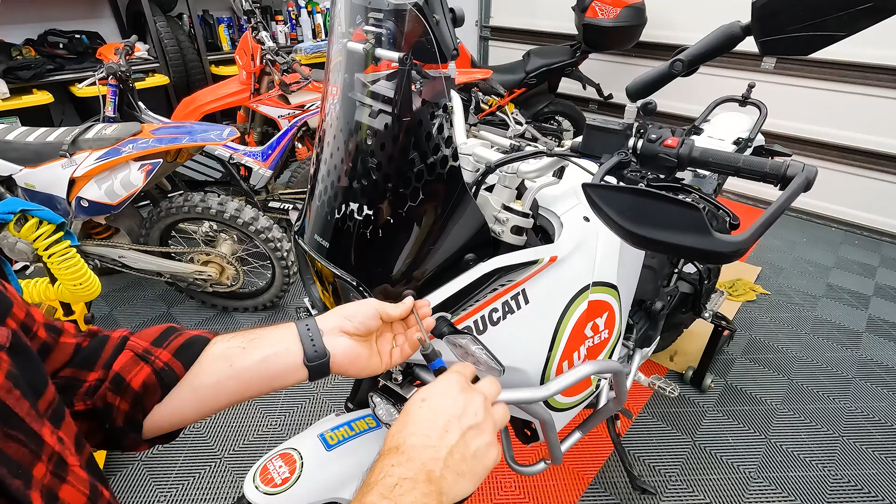These screws here, you can use a number 4 Allen and it will come off. These two are also number 4s, so we'll get them off now.

Behind this screw there's a big hex nut. It's really big, so I don't have a wrench that will get to that, so I need one of these. There's not a lot of torque in that, just holding it in place - you can almost hold it with your hand. I prefer to do it with this crescent wrench. Just be careful because the nut will fall. It stays on the rubber grommet, so you don't need to remove it from the rubber grommet - trust me, it's there.

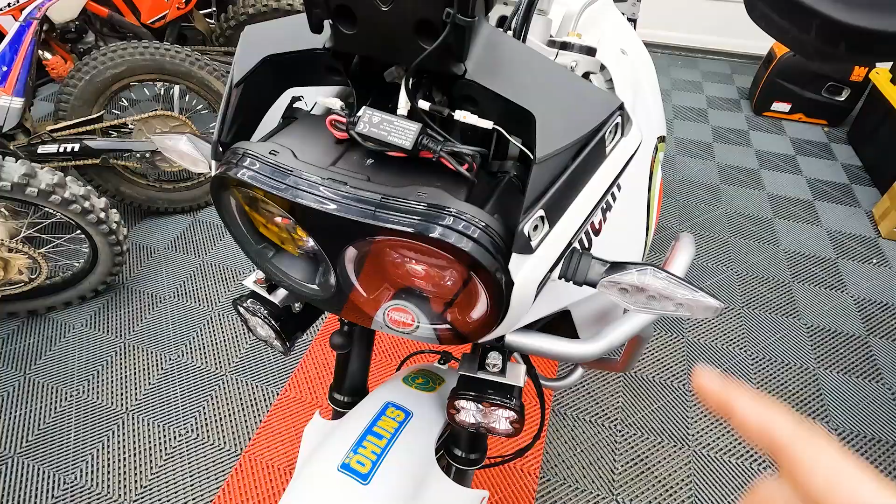Before removing the side panels, don't forget to disconnect the blinkers. So you have this one here for the left side, and you have this one here for the right side.

There's one hook here, another one here, and a big one down here. This was the nut - it's a metal nut - but this is the one that stays on the rubber grommet on the other side of the panel. And the last hook is here. It's a little bit more complicated to remove with the crash bars installed, but not impossible.

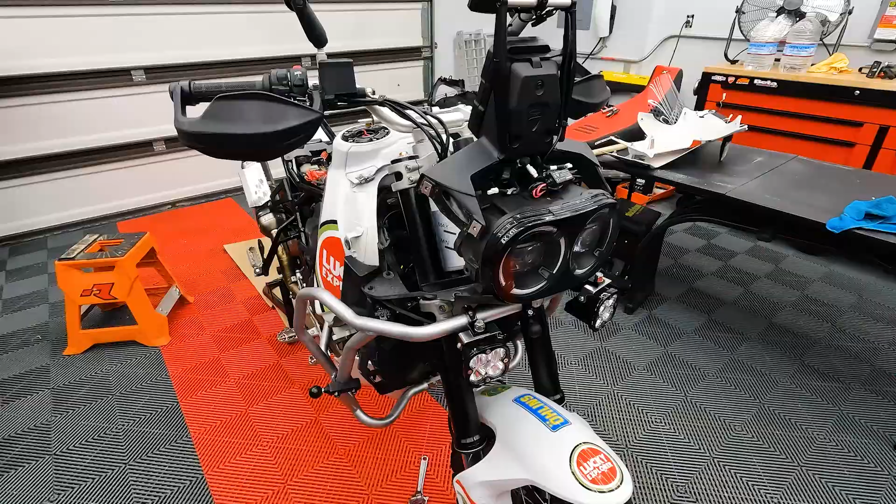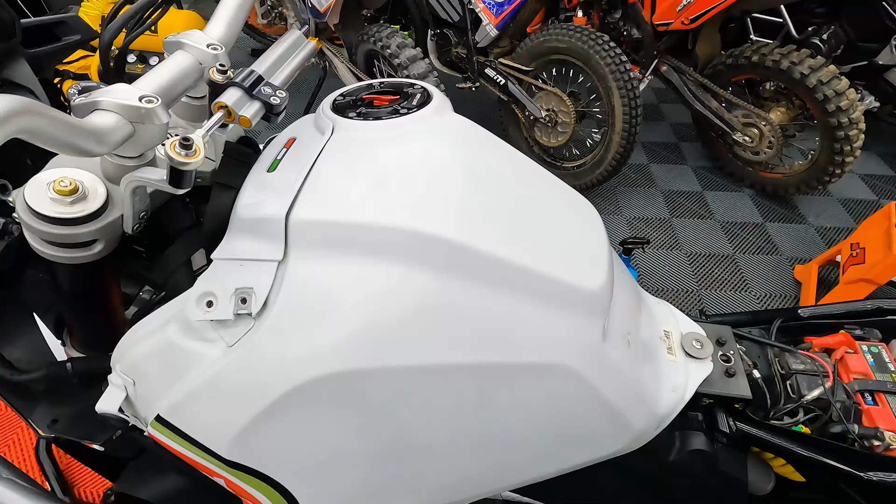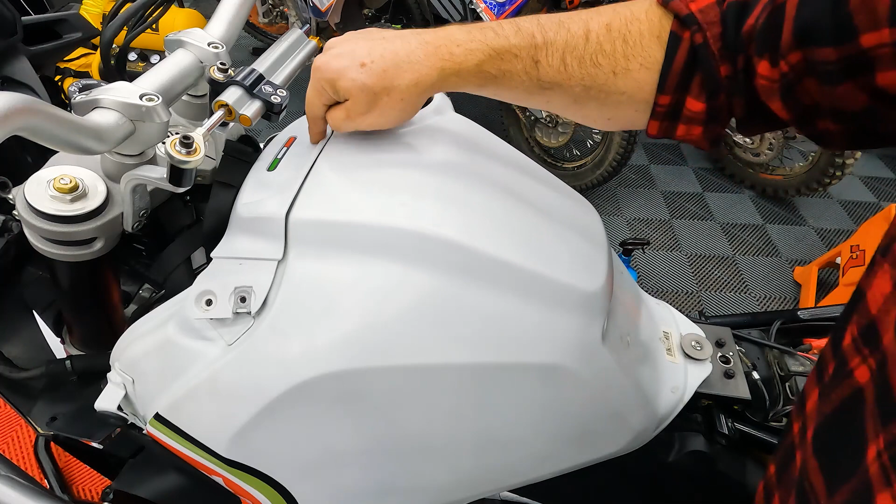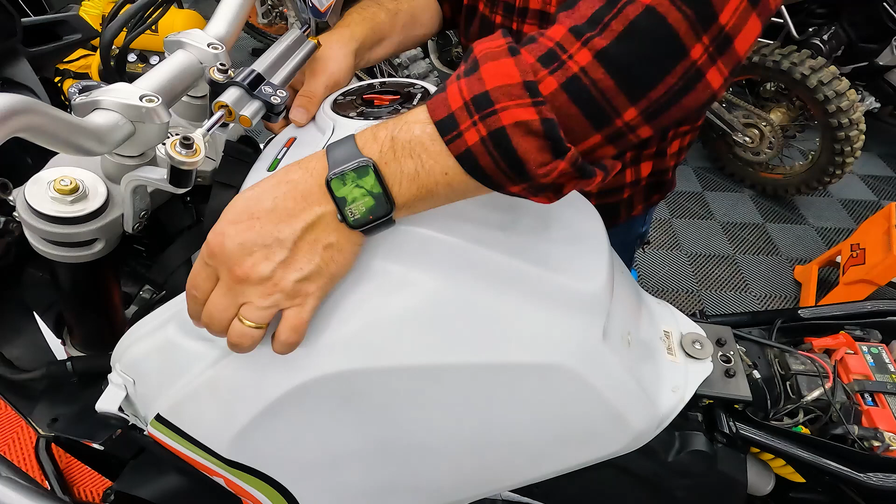There are two main screws that hold this tank to the frame. One is this one here, obvious. The other one is under this, so we're gonna have to remove this piece of plastic here. I don't see any screw - it might be that it's connected only by a hook. So we'll see. Yeah, as suspected, you just pull this out. So basically you have this hook here connected here, and there's this other feature that engages a rubber sheath here. So just take it out.

I suspect we're gonna have to take out the steering damper as well. This is not the OEM, this is one from Öhlins, an aftermarket one, but it's pretty much the same. So the supporting structure, which is this guy here and this one here, is still the stock one. So I can see the screw - well, it doesn't look like a screw really. So we need to investigate a little bit more. We'll go there.

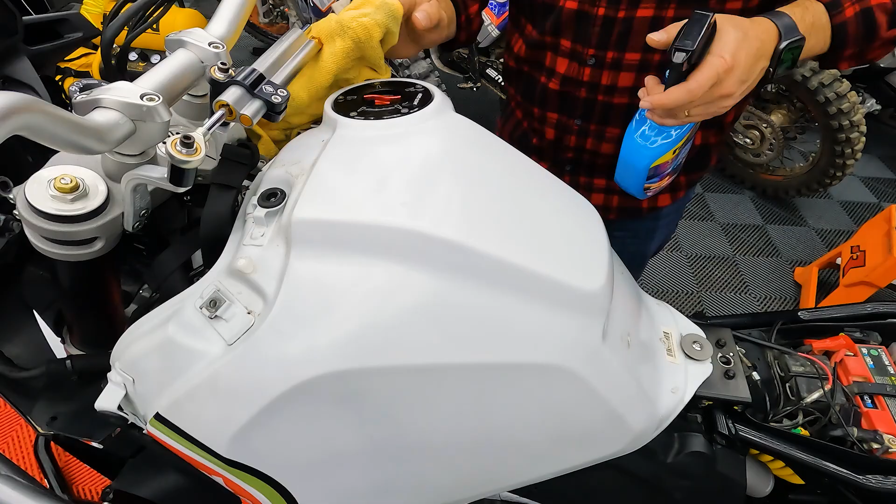This strap here I use for my Mosko Moto Nomax tank bag, so I'll just take it out here so it's not in the way. Instead of removing it completely, I'll just strap it on the back here.

So we'll take the entire stabilizer here by removing this screw here. You could remove this, but it's a little bit more difficult access. This one here you have to be careful because there is this spacer - I don't want the spacer to fall down. And you have this, but I'm gonna remove straight from here if I can access those screws. Well, it doesn't look like it's easy access, so I'll remove the entire bar stabilizer first, and then we'll see how I go from there.

If I remember, this is a number 4 - yeah, number 5. I put some Loctite when I installed it last time, so I think I'll have to do that again when we reinstall. Same with this. By the way, this is awesome in the sand, really helps much more than the OEM bar stabilizer. Okay, so this is out.

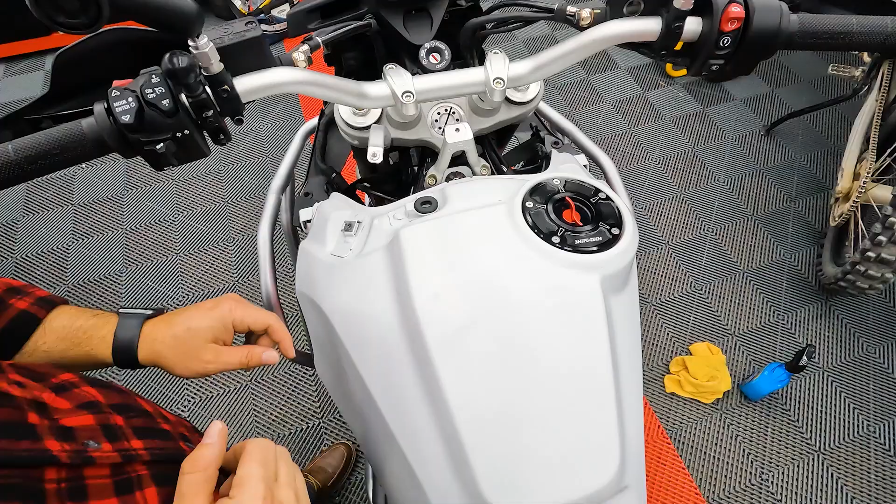And it's out. Okay, now I'm going to remove the support head for the bar stabilizer just to give us some more room. I suspect that the tank is going to pivot this way, so this is going to be in the way. So I'm going to get this out.

Looks like a number 5 as well. Never took this out, and it feels like it was Loctited as well. So we'll put either a blue Loctite.

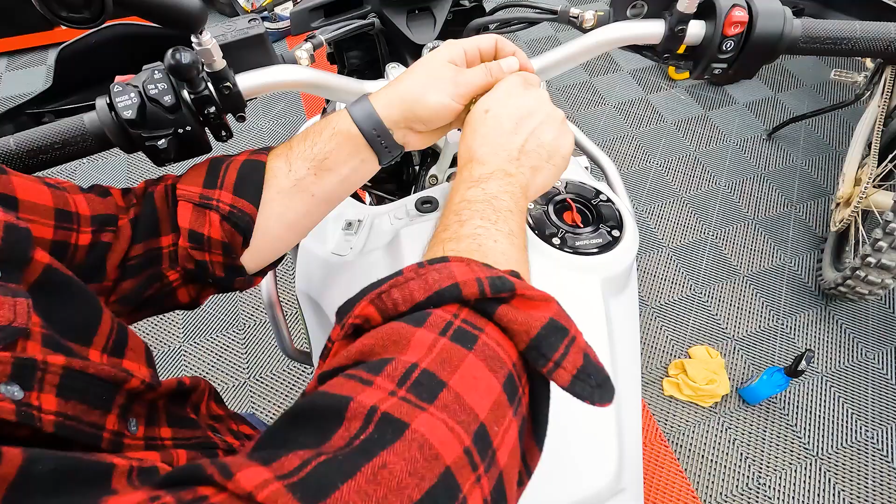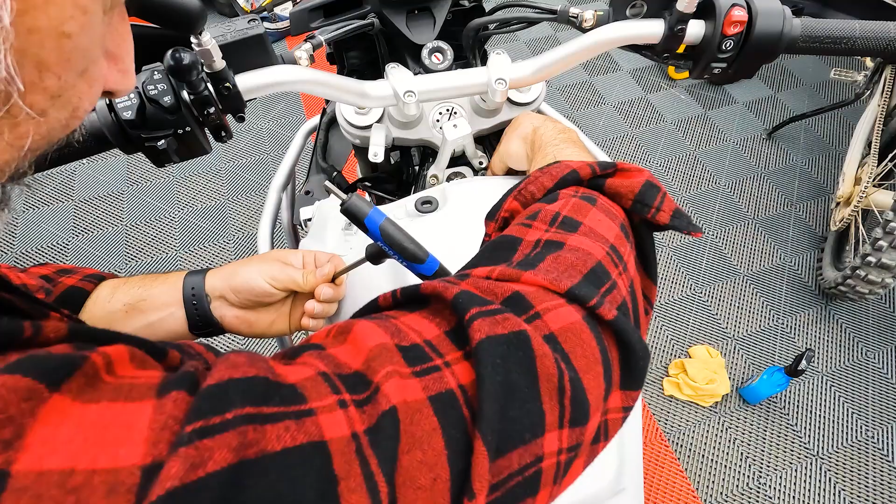Not sure if a red Loctite is necessary. Oh, didn't like that. There are no washers on the other side, so no worries. And it looks like it came with blue Loctite, so we'll put blue Loctite when we are reassembling.

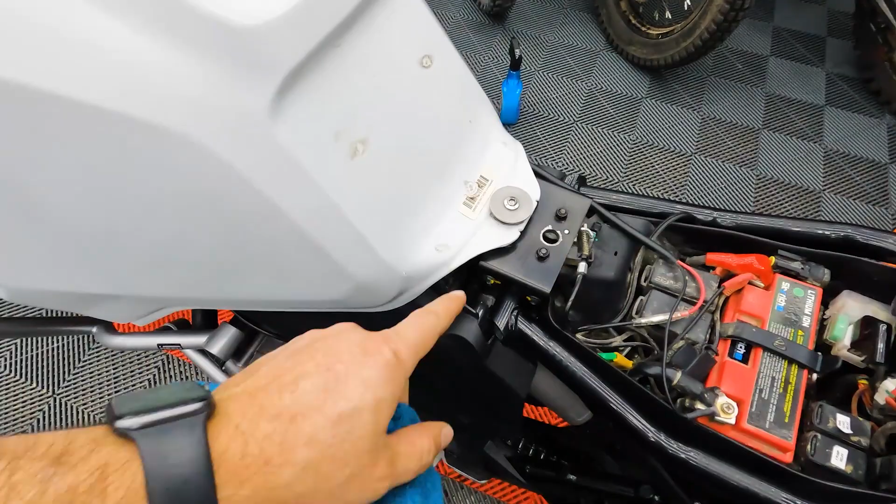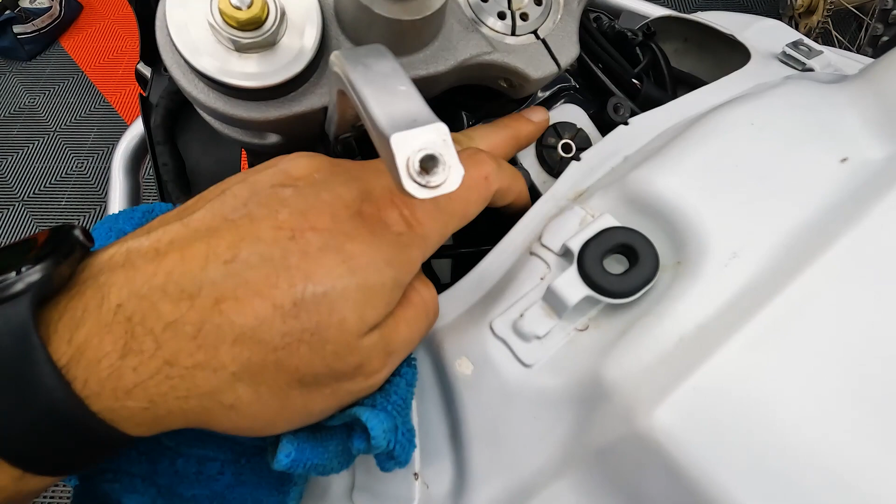At this point, you can see that the tank already moves a little bit. This is actually weird, and I'll show you why. This is one of the screws that hold the tank to the frame. As you can see here, there's no screw here, there's no screw holding this part to the frame. So according to the parts manual, let's try to zoom in a little bit more here.

As you can see, there is a screw and a spacer here that goes through the back of the tank into this piece here. Seems like a rubber isolated mount, which seems very similar to the one on the front.

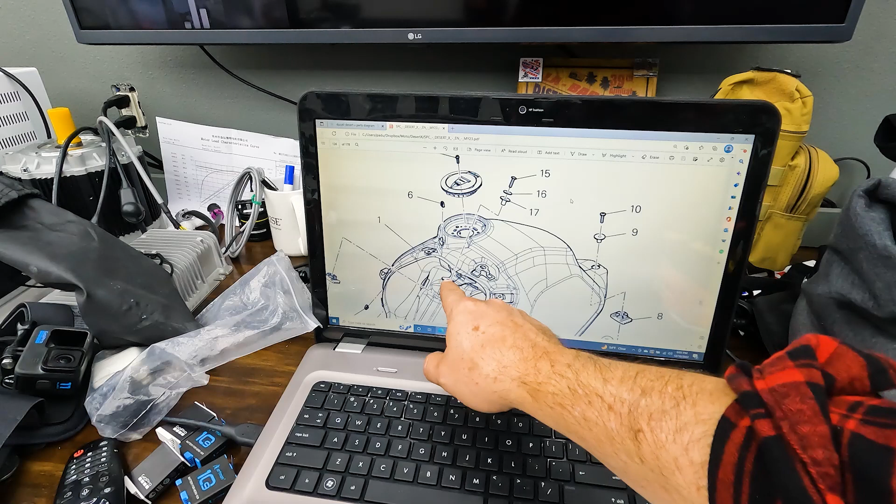Now let's take a look at the front of the tank. You can see a flange, a metal flange here, which is on the tank. Let's slide a little bit to the other side here, it's going to be very visible. So you can see the isolating mount here, which goes to the frame.

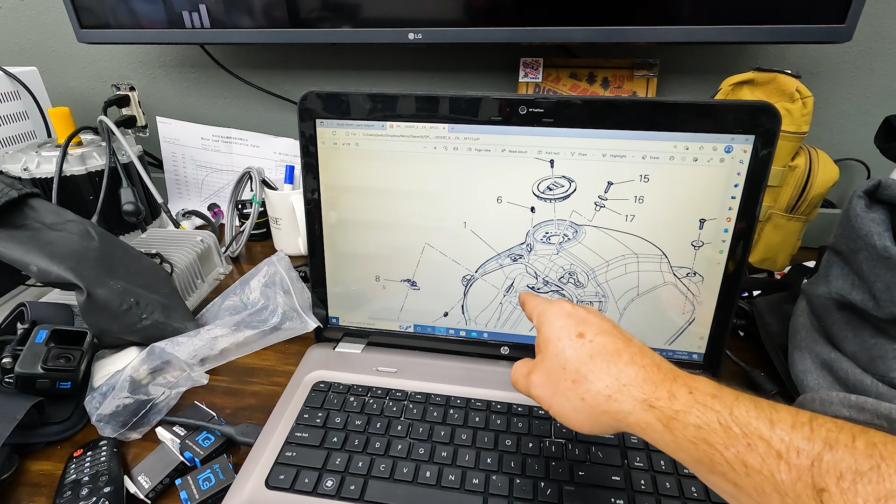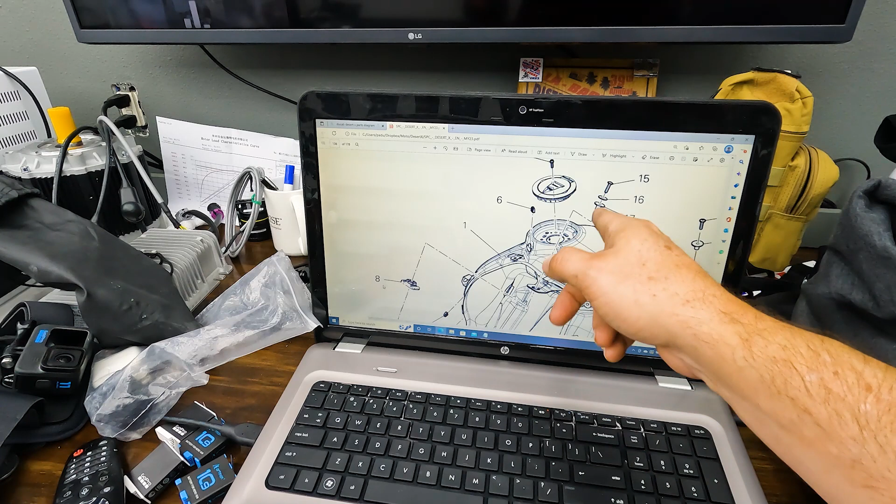I wonder if they forgot to put it back. So before I reassemble, I'm going to order these parts here. I don't want to be with the tank flexing and jumping when I'm going off-road. So forget about that one. Let's remove this one and see what happens.

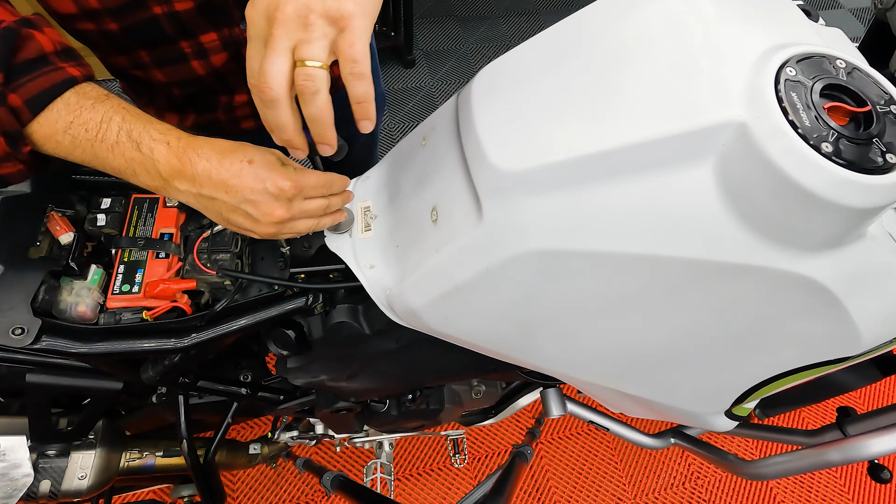Okay, so it looks like it has some Loctite as well. Not too bad. I have a screw, looks like it's with red Loctite, not a lot though. A washer. And a spacer. I suspect that the same set here is on the front.

I can see the isolator here. Yeah, at this point, the tank is already moving. We can't pull it off yet because it's still connected to all the gas hoses and also to the fuel pump and all the electronics on the fuel pump. So we'll take care of that next.

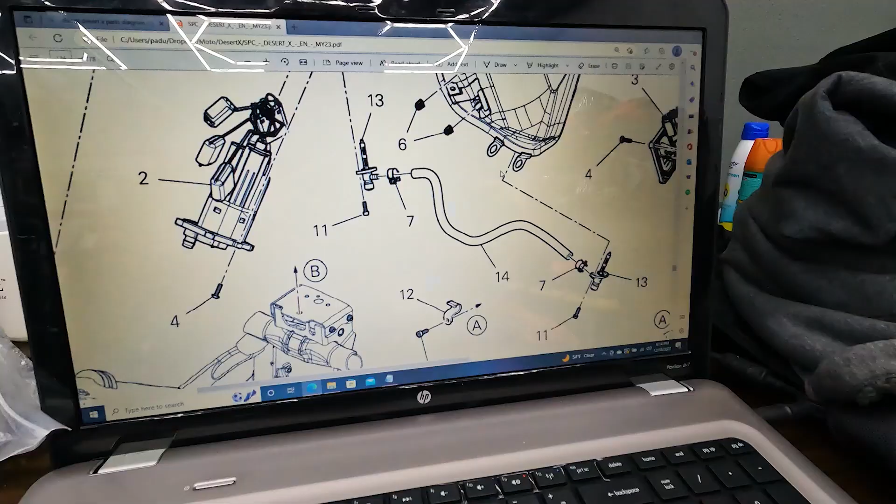Yeah, as you can see, it's completely free now, from both the front end here and from the back end. Since we're gonna have to disconnect the hoses, the gas hoses from the tank, my main question was, how do I prevent gasoline from spilling from the tank? And Ducati already solved that.

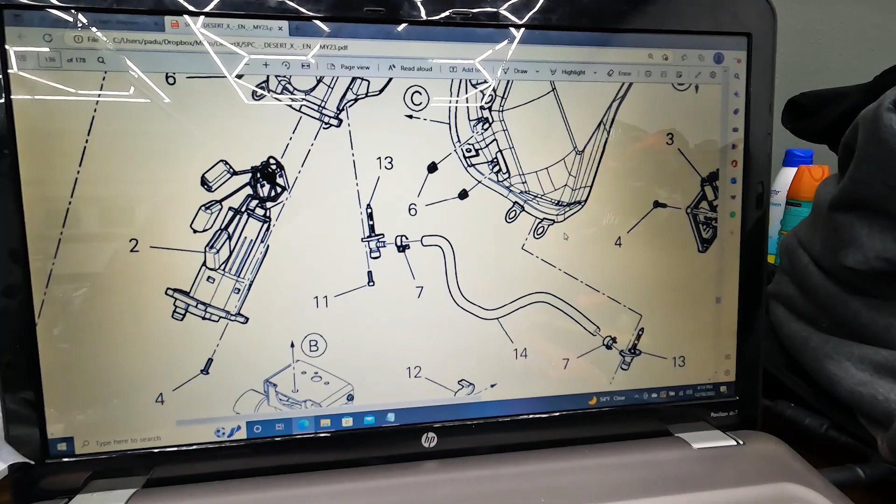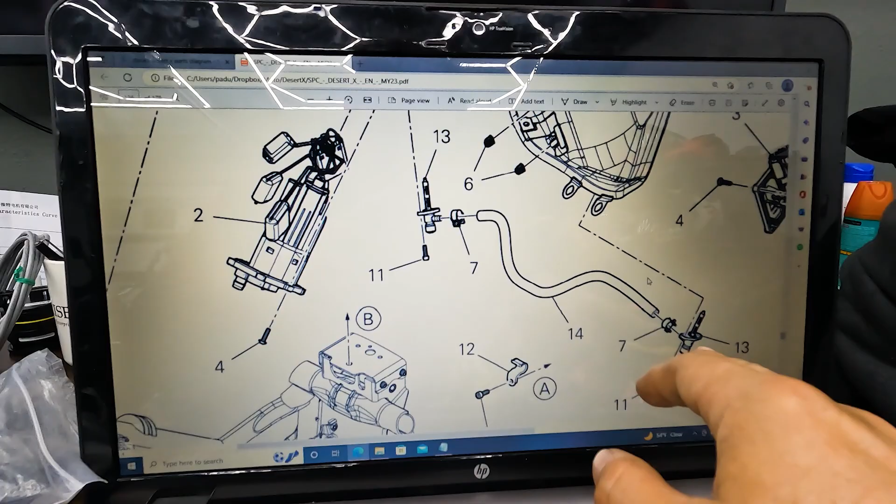So there are two connections to the hose. One is on the left side of the tank and the other one is on the right side of the tank, and it's through this petcock valve here on this side. I suspect that then you can unscrew these clamps and then remove the hoses. The weird thing is it's a straight through, so I'm suspecting that this is basically so gasoline can flow from one side to the other side of the tank.

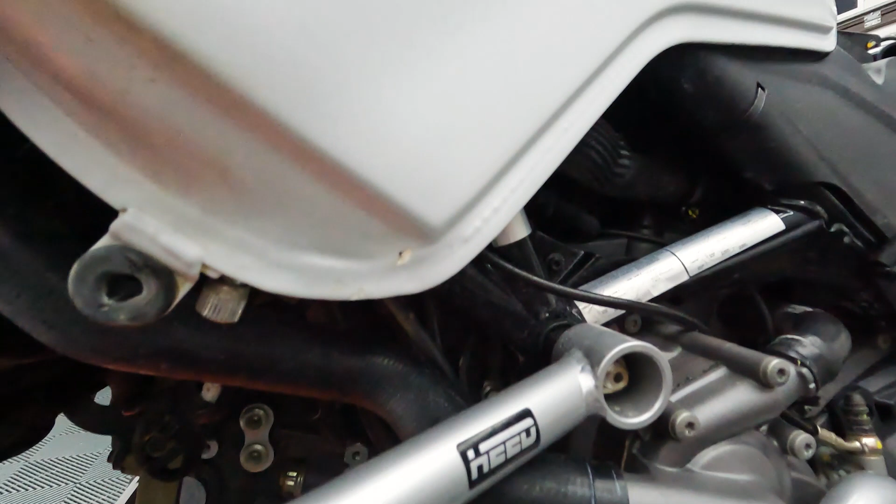So let's take a look at the left side. If we go under here, you can see the petcock valve. So I'm going to start screwing it in. So I believe that this side here is closed. Let's take a look at the other side.

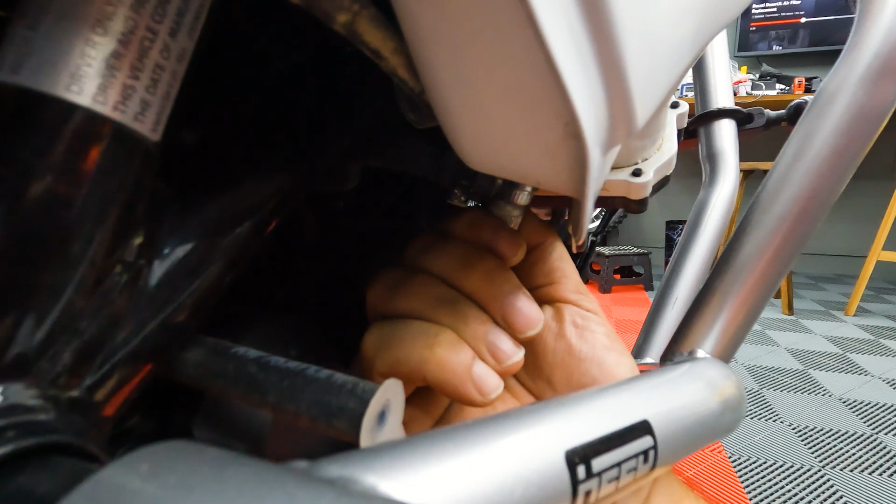So the other one is right here. I don't know if you can see it. Okay, it's closed. And here's one hose, little screw here. So we can disconnect it from this side, and we'll do the same to the other side.

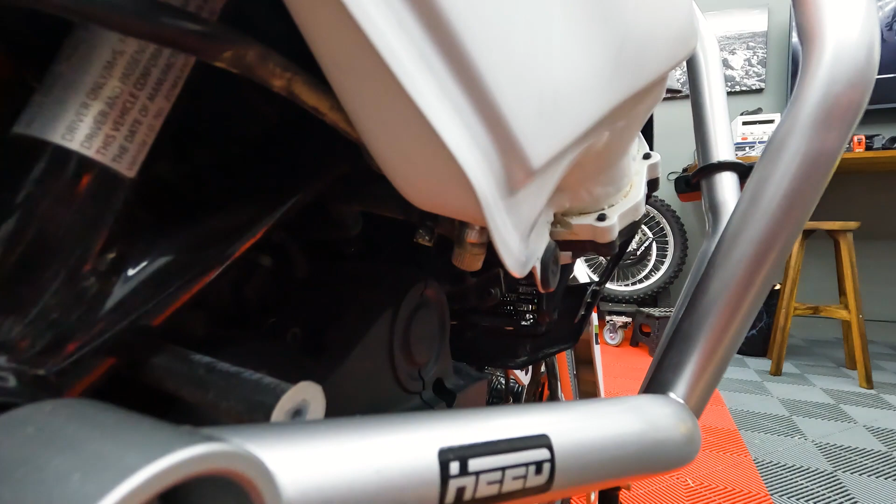The fuel pump on the Desert X is on this side here. So we're gonna have to disconnect a few wires from here. And I believe that that's gonna be it, and we're gonna be able to remove the tank.

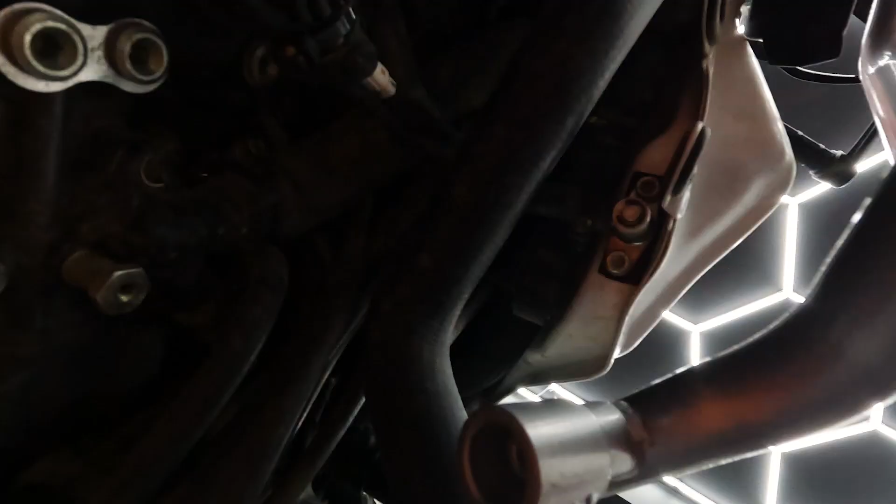Okay, so on this side here. Here's on the other side. This is on the left side of the bike. We'll just loosen here, and as I disconnect, I'll get a rag. So I suspect that this is going to leak a lot of gasoline. So we'll see how it goes.

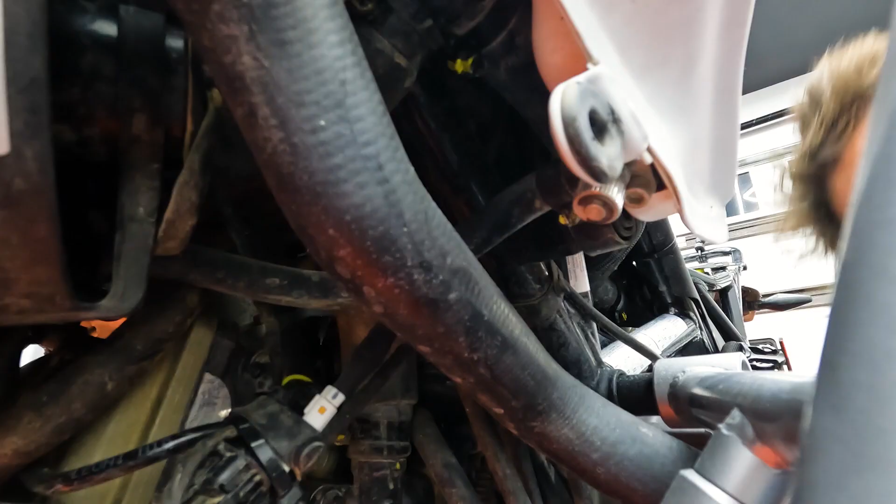Okay, seems close enough. Yeah, here's the gasoline. Hopefully it will stop at some point. Yeah, okay. Don't smoke while you're doing this. And we'll do the same on the other side.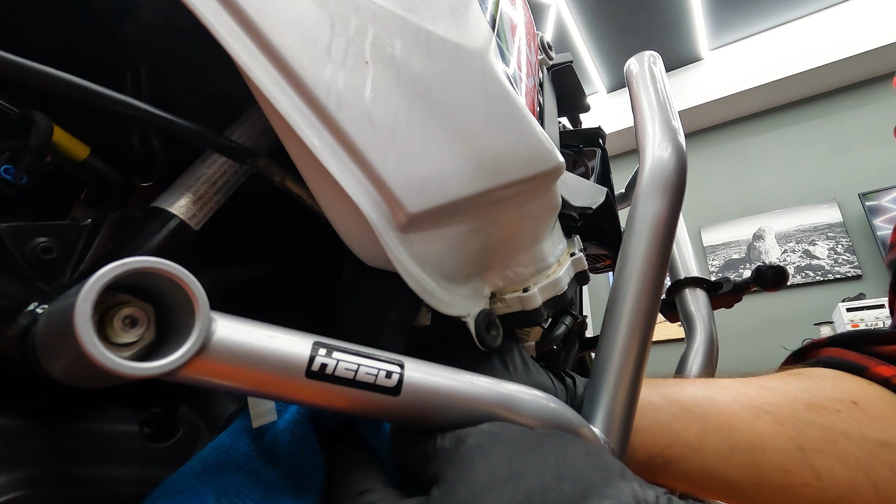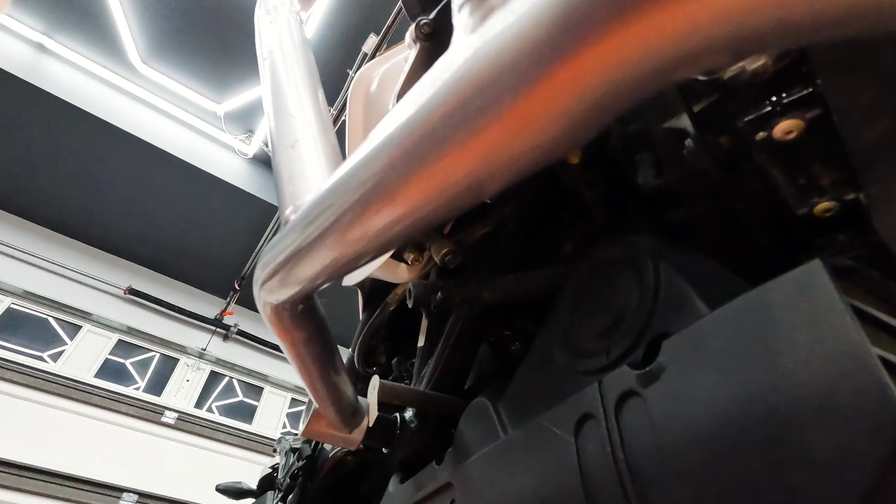Let's take a look at the bottom here. I'll put some light, let's see if I can find the best angle. So this is the fuel pump.

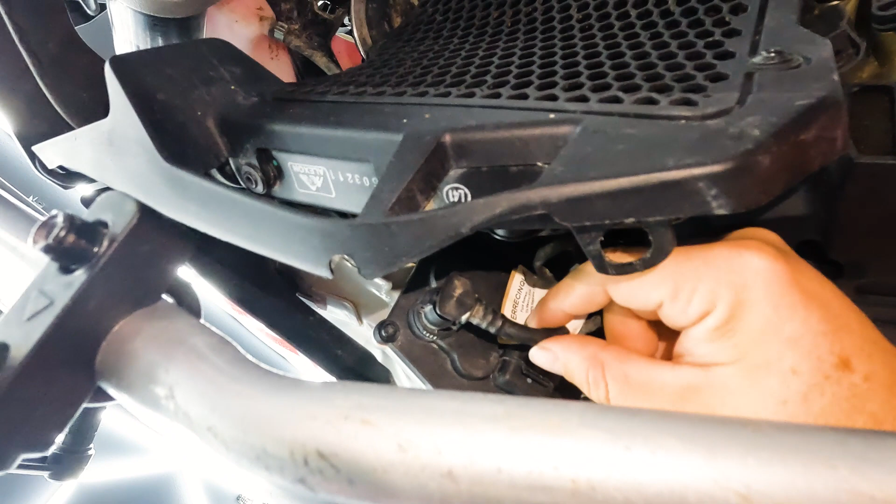There's a hose here I suspect we're going to have to disconnect. And then there's an electrical connector here, so this is probably very easy to disconnect. It's one of those that has a retention tab.

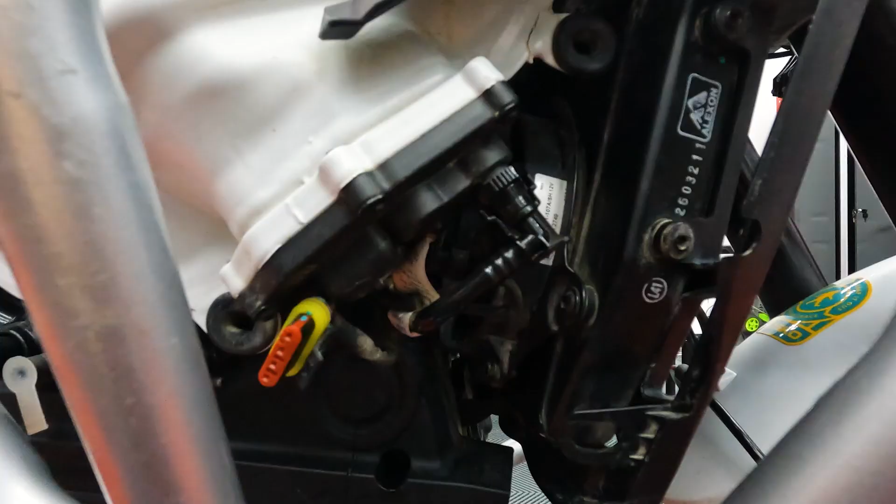Yeah, there you go, one of those automotive connectors. So that's out, so we just need now to disconnect this hose. So this one here, you just press on these tabs and yank it off, and gasoline will start coming out.

So I'll do that without the camera on, or at least I'll try to put it on the tripod again. Let's get the rag ready here.

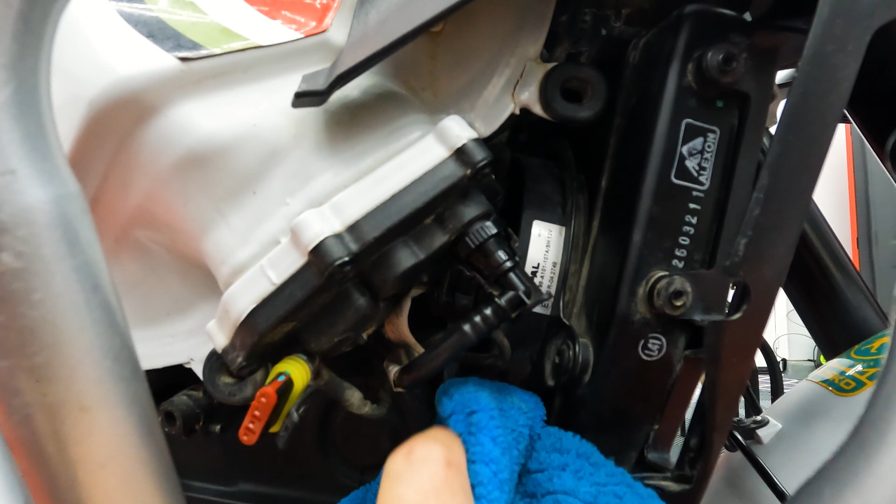Okay, so that's easy, there's a kind of O-ring there. So now the fuel pump is completely disconnected. It's basically this hose clamp, or this hose nozzle, and the electrical connection. And in theory, the fuel tank is completely disconnected from the bike at this point.

Okay, let's see if the theory holds. Of course, I wasn't smart enough to do this while the fuel tank was empty, so the fuel tank is full. It's going to be a little bit harder.

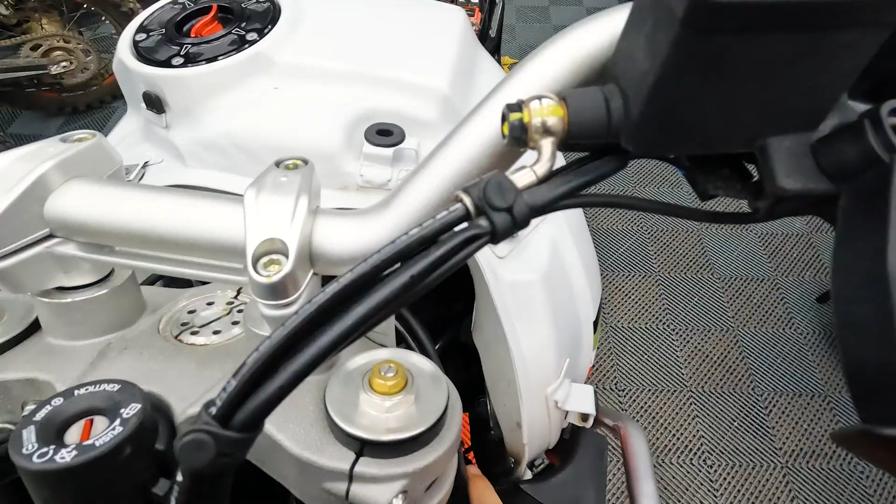And there's another wire on this side here, so it's not completely free yet. On this side, looks like there's another electrical cable right here. Try to disconnect it.

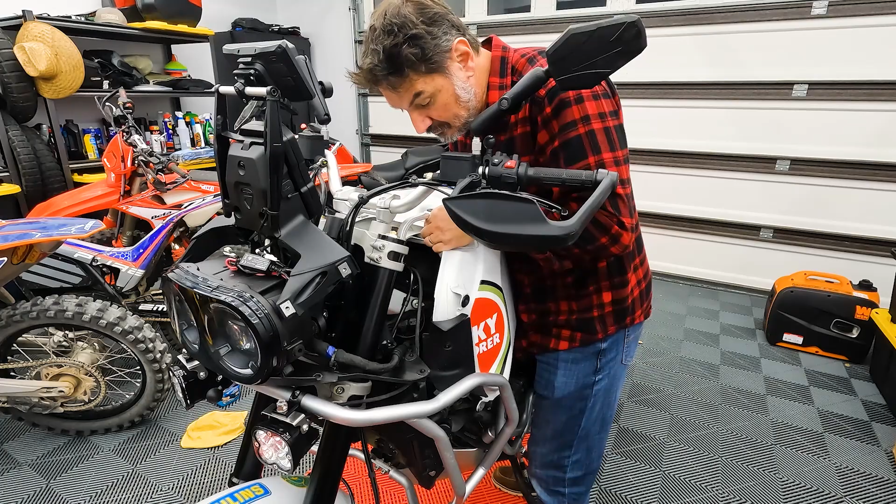Okay, that's disconnected. Okay, let's try again. Another cable right here, I have no idea what that's for.

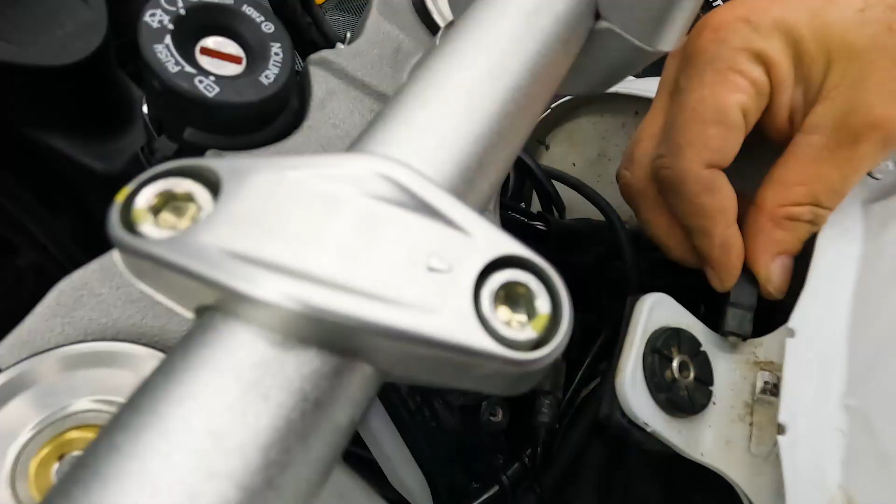Okay, it's just a ground lug that goes straight here. So let me show, this was right here. So just disconnected, pretty easy.

There are two main hoses here, they're going down. You can already see the air filter right here.

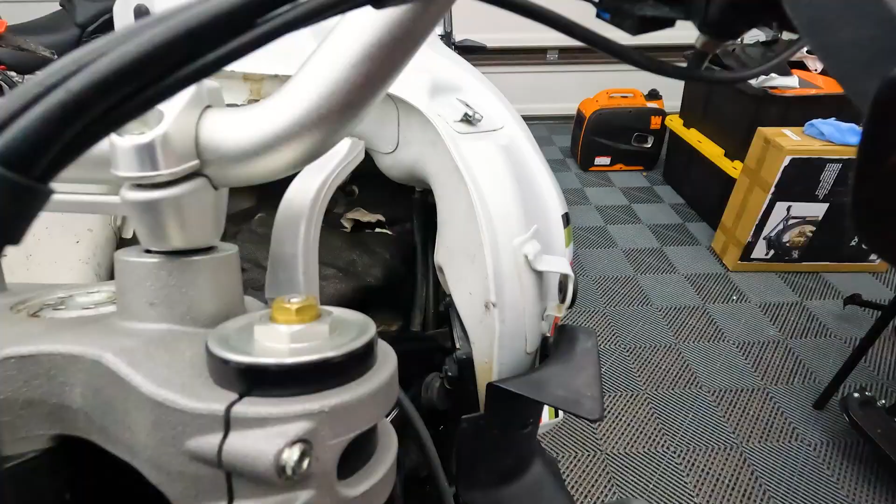So we'll have to strategize here. So these are the two fuel hoses that I was talking about. They go, I'm assuming, from the fuel tank straight to the carburetor or to the fuel injector.

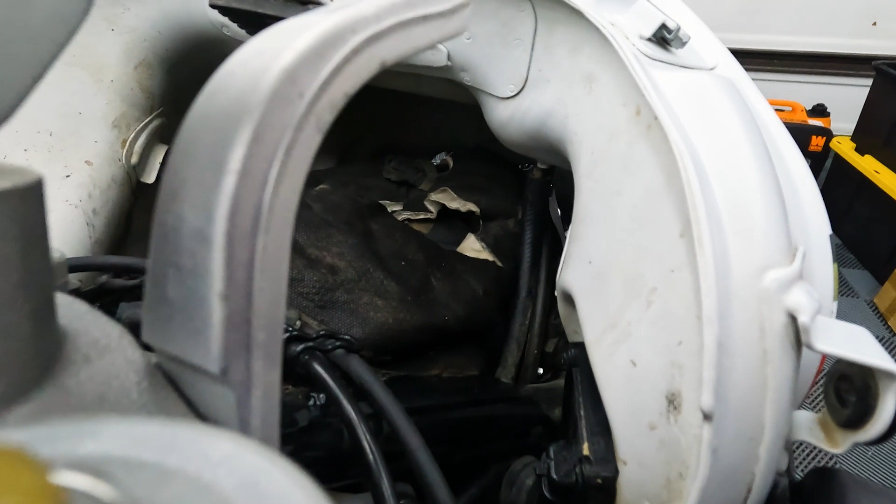And since the tank is full, I'm not sure if the fuel level is low enough that it's not going to start leaking. So I think what I'm going to have to do is put a hose through here and drain the fuel tank first.

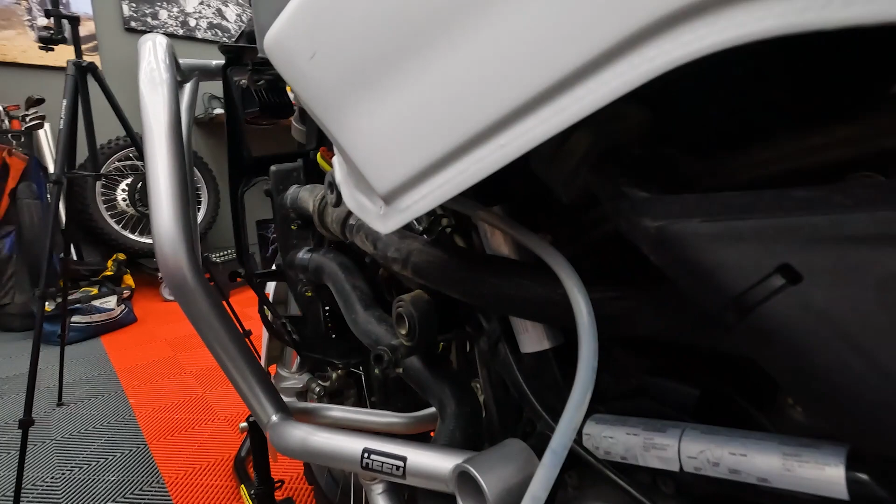So, better strategy: instead of putting a hose in there and trying to suck it out of the tank, there's a petcock here. So I just connected a hose, I'm just going to drain here.

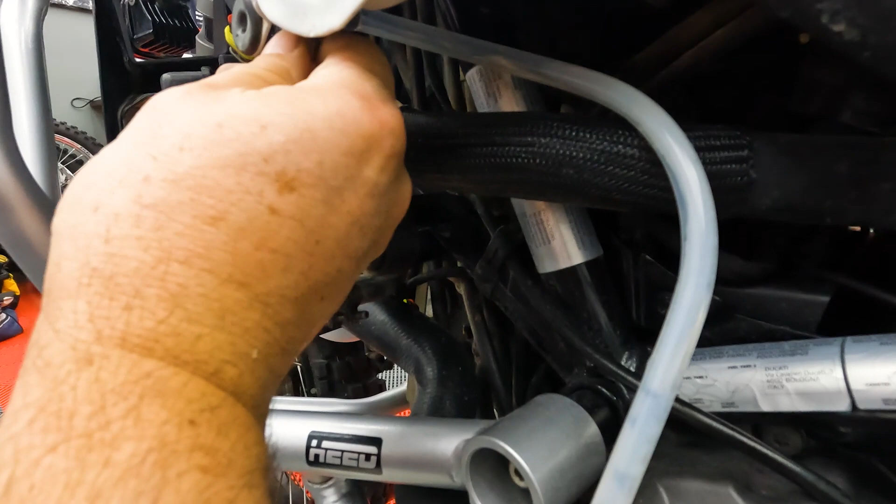So let's see if it works. Let's open the petcock. There you go.

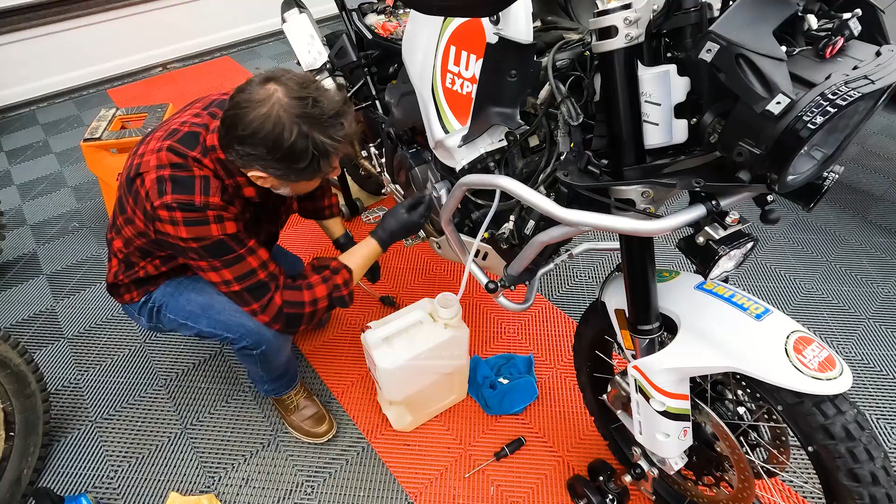Okay, now that the fuel tank is a little bit less full, we try to disconnect these two hoses here. Doesn't look like there's a clamp in there, so just try to disconnect it.

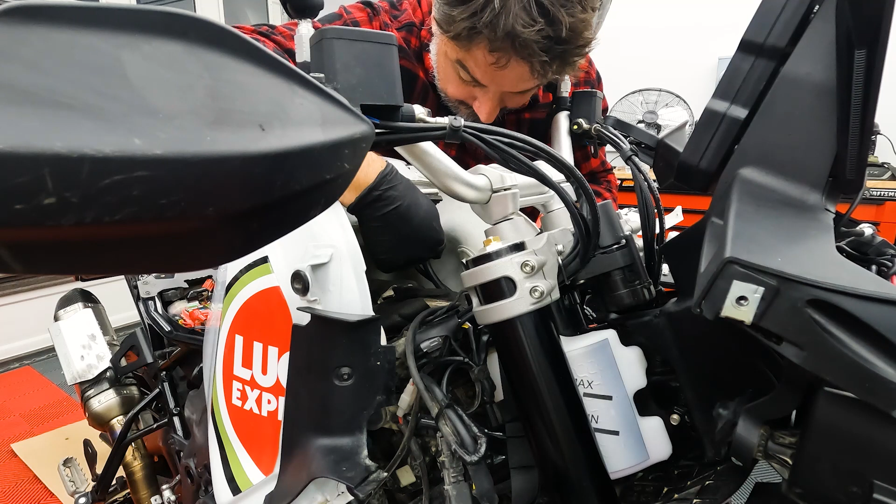Just to note, there are two hoses. The front one, closer to the front of the bike, is a little bit thicker and heavier, with some kind of metal wiring, metal coating. Let's see if it's going to come off.

Yeah, it came off. And the rear one is like a rubber hose, so I don't know if it's possible to mix them up, but just so we don't, this is how they are.

Okay, no gasoline coming out of them. So they do look like they have two separate diameters. So the two hoses are off. Let's try lifting again — yep, comes out clean.

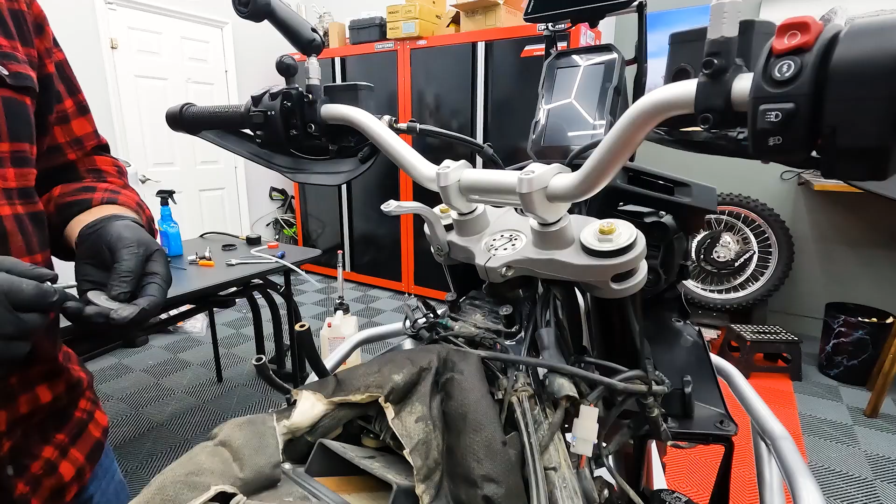There you go, tank is off. So just to confirm, these were the screws that we took from the rear part of the tank that goes into the frame.

This was where we had that rubber isolator and no screw in there. The frame is threaded, so the same screw that goes on the rear also goes in the front. So that confirms that we are probably missing a screw here. So I'm going to put an order with Ducati and see how long it takes for a screw to show up.

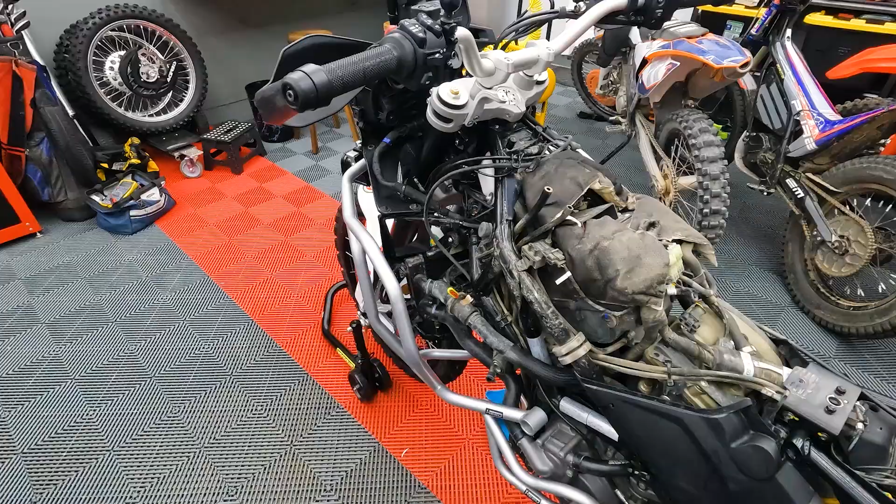So this is how the bike looks without the tank. As we can see, this is the head of the rear cylinder, so we know it's an L shape. So the other cylinder head is down there in the front of the bike, pointing towards the front wheel.

So this is the air filter unit, so there seems to be this isolator around it. Let's see if it's loose. It's kind of loose.

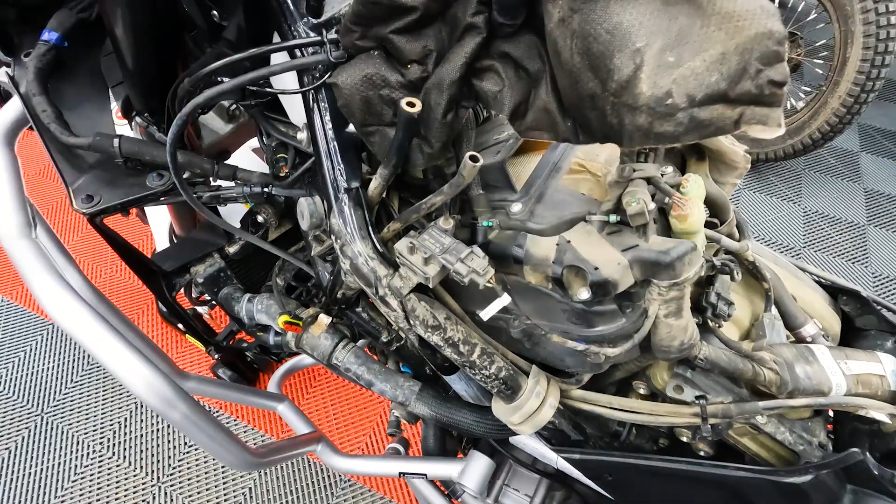So, yeah, it's not — it's just a piece of foam that goes around it with no particular order. So it's just stuck here a little bit. We'll clean it up really good before we put it back in.

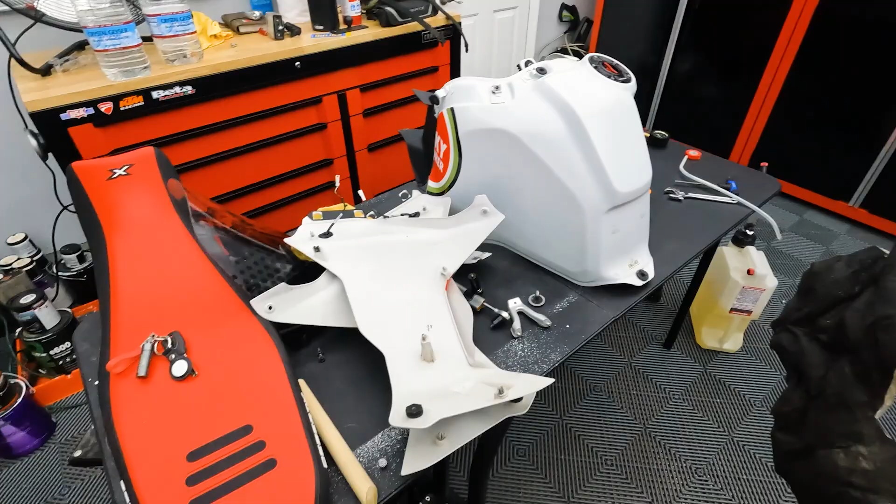There you go. So there you go, these are the parts in order: seat, covers, tank.

So here's the airbox. It looks really dusty, so we'll see how we're going to access this, but before, I'll do some cleanup here first.

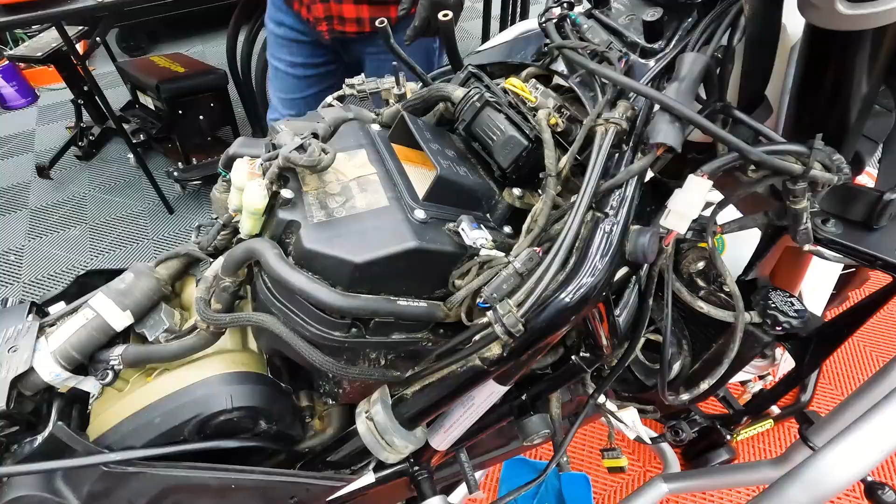From what I understand, this is the ECU right here. Looks like there is a clamping electrical cable here. The air filter is right here.

It doesn't look like it will come out from here, so we need to take this cover out. There are 1, 2, 3, and 4 screws right here. And then there is the ECU screws right here.

At least, here comes the ECU out if we take these 2 screws. So I think we're gonna do that. We're gonna take the 2 ECU screws out. That will probably free up the top of the ECU cover.

And then we can undo this 4. So this looks like Torx, so we need to get a Torx. So they're all T20 Torx. We'll start with these stock ones here first.

Looks like it's a plastic screw, at least this one here. There you go.

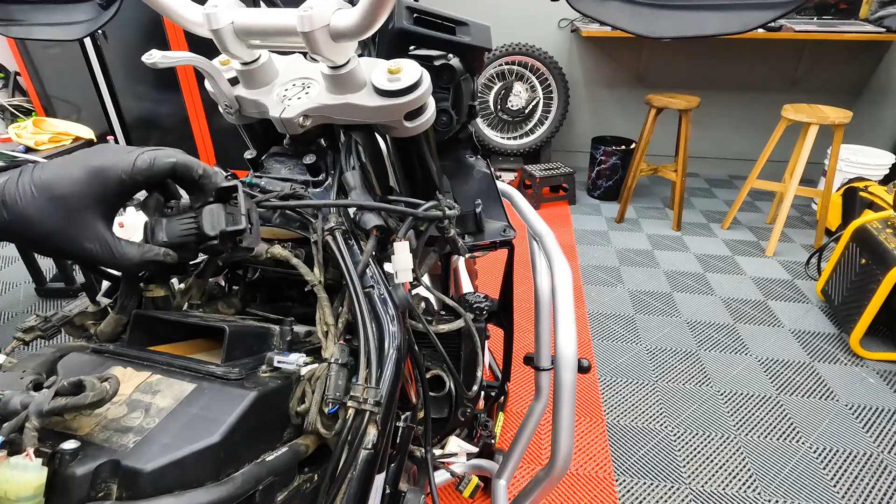Okay, so here's the ECU. It just came out, so the ECU came out. So now you can see that there are 1 and 2 screws here.

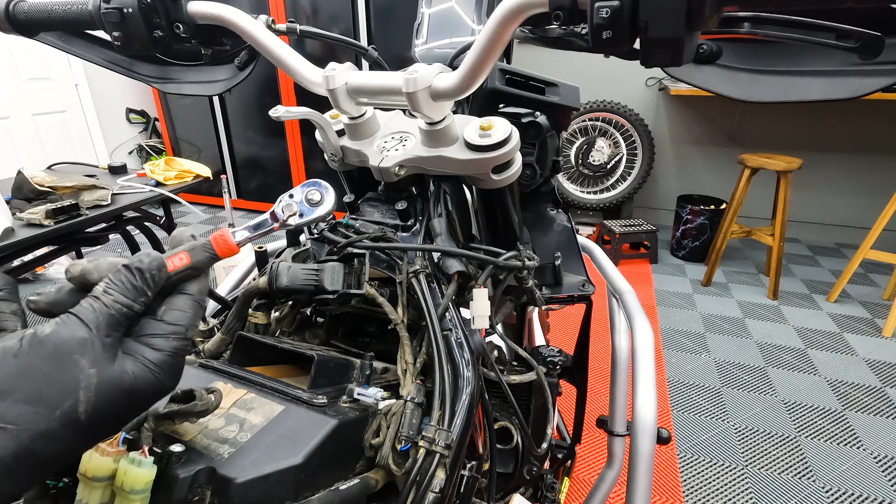We need a different tool to get in there. Let's see if this will do. It's tight, so we need to get to one back there and the other one on the right. So it's really tight, I'm just starting it, and then I'll try to finish by hand.

Of course, now it's not going to come out easily because the screw is higher. Okay, it's out, so let's detach this and see if we can go the rest of the way by hand.

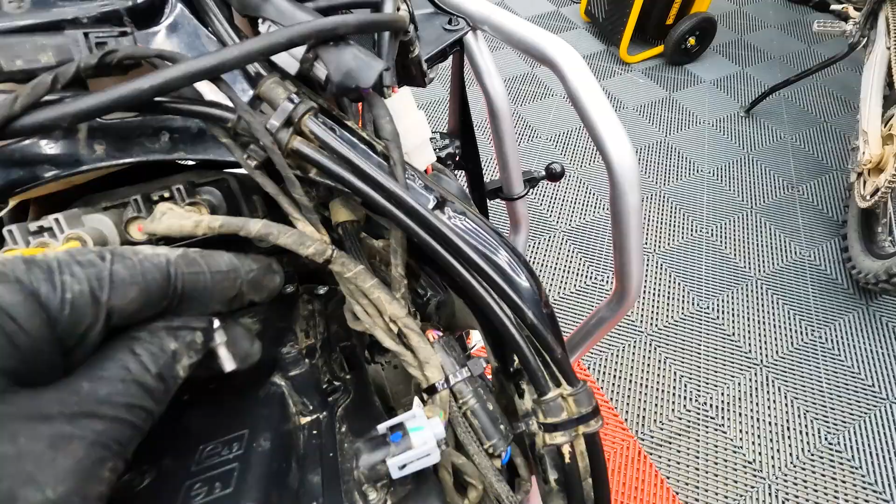Let's see, and pray that this doesn't go down. Okay, it's in. Okay, it's spinning. I have no idea how I'm going to put this back there. Maybe I won't, maybe this will have only 4 screws in the future.

Careful. Okay, one is out. The last one. So, or maybe not. Maybe I'll leave that one just a little bit loose.

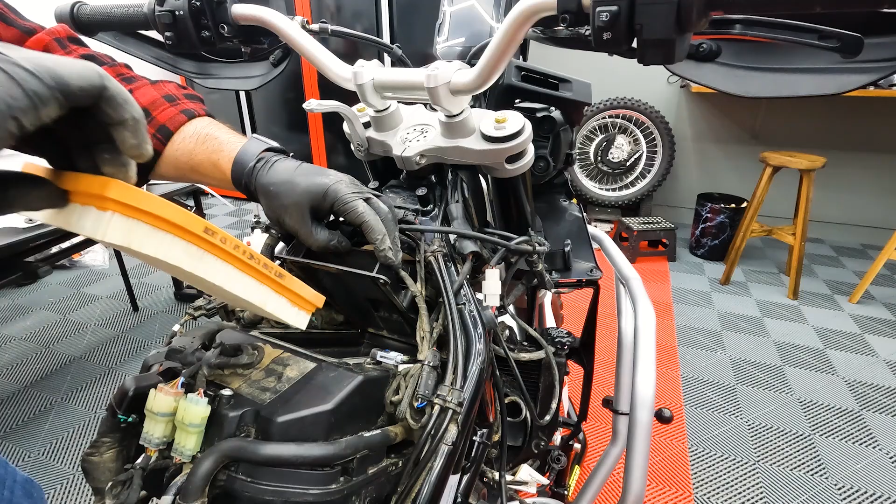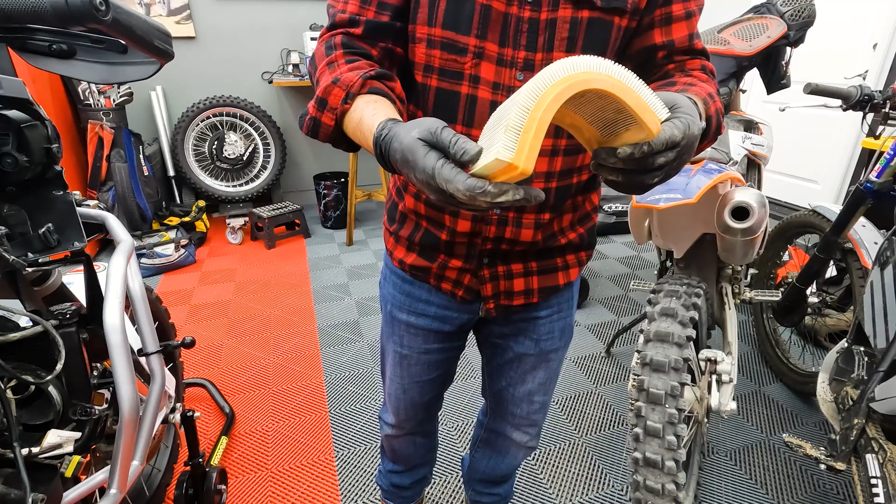And here's the air filter. And there's a lot of sand in here. Doesn't look to be bad or anything like that, it's just sand. I think what I'm going to do is just clean it out with air from the bottom to the top.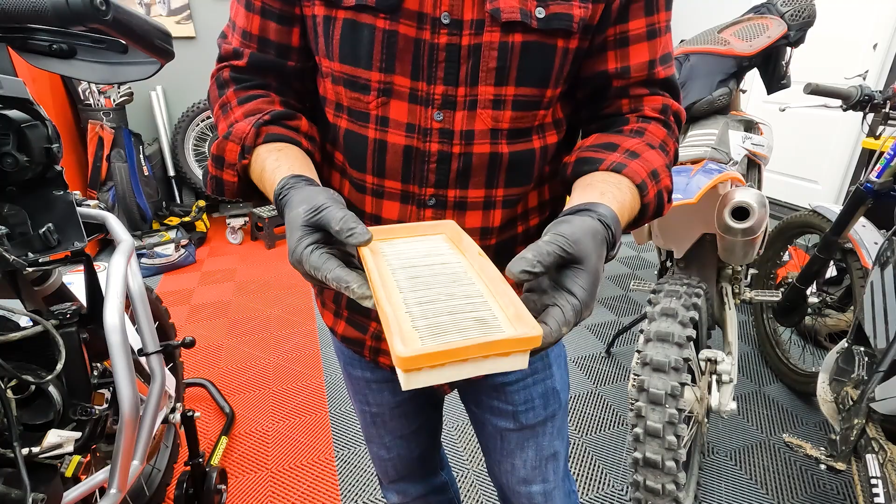And replace it. I will also take a look, before I do this, at some of the aftermarket options and see what's the current lead time. I'll put some rags in there, so this bike is going to stay there for a couple of days until I order some parts. And maybe I'll expand this project to make this an aftermarket one. I'll see what are the advantages. If there's not a lot of advantages, I'll just replace with this one.

Don't know if you can see on the video, but there's a lot of dust in here. Oh my God, yeah, take a look at that. Yeah, there's an entire beach here.